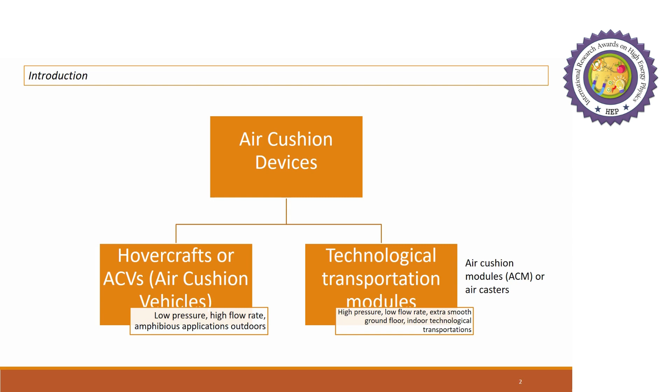However, thus far, a theory that convincingly describes the stability of a high-pressure ACM in equilibrium state and its vertical up and down dynamics has not been reported in open literature.

The vertical dynamics is important because high-pressure ACMs undergo vertical auto-oscillations. This compels operators to reduce the airflow rate in the module to a minimum, thus increasing the friction force. This fact constrains the application of high-pressure ACMs.

It also prevents lowering the stringent requirements of the support surface. For example, to reduce friction for moving loads on a typical concrete surface, the airflow rate must be 25 times greater than the rate required for a smooth steel sheet surface.

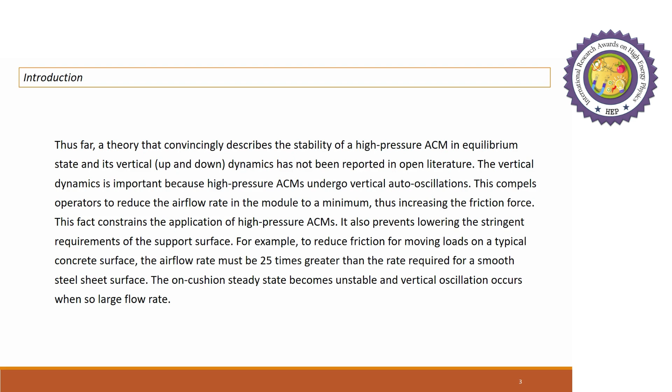Then the on-cushion steady state becomes unstable and vertical oscillation occurs when so large a flow rate is used.

Accordingly, in this study, an analytical model of the ACM vertical dynamics is devised. Moreover, the stability of its on-cushion steady state and its dynamic behavior when auto-oscillating are investigated.

Air compressibility is consistently considered not only for the cushion plenum zone, but also for the inlet and outlet flow regions. Traditional linear stability analysis is supplemented with a numerical evaluation of the nonlinear system response. This provides deep insight into a broad view of the physics of the vertical vibration of high-pressure ACMs.

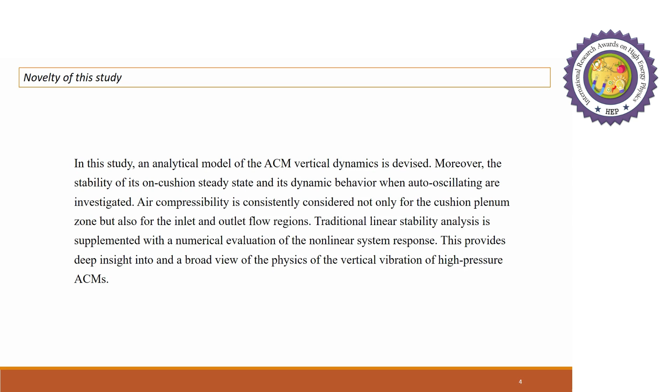A typical high-pressure ACM is illustrated in Figure 1. The influence of the flexible bellow or skirt for ACVs on the air cushion system dynamics is expected to be significant.

However, the coupled processes of cushion aerodynamics, hull motion, and flexible bellow dynamics, including deformation, are difficult to describe. Accordingly, in many studies, the shape of the ACV skirt was considered to be fixed and had no influence on heave dynamics. In establishing the research objectives, assuming a simplified schematic based on the replacement of the rubber bellow by a hard sidewall as shown in Figure 2 is methodologically useful.

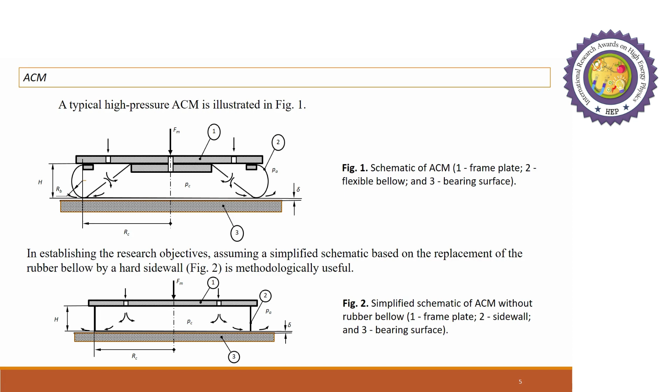The connection of the ACM to a compressed air source is considered according to the circuit shown in Figure 3. The receiver, component 1, is charged from a compressed air network or individual compressor. The pressure-reducing valve, component 2, maintains constant pressure P sub R before the inlet of the air cushion module.

The air temperature T sub R before the inlet is assumed to be constant. The throttle valve, component 3, at the inlet enables flow rate variation into the air cushion with constant supply pressure P sub R. The volume of the air cushion is component 4.

The outlet gap between the rubber bellow in Figure 1 or sidewall in Figure 2 and floor is considered as a throttle orifice 5, varying with the cushion pressure P sub C.

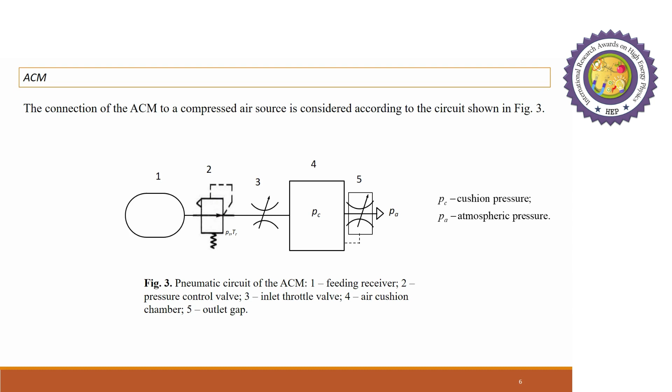Involving the dynamics of the rubber bellow in the analytical study of ACM equilibrium stability is problematic. Therefore, at this stage, an ACM based on the schematic in Figure 2 is considered to determine the internal regularities that do not depend on the rubber bellow.

Most studies on the vertical dynamics of the ACV and high load ACM are based on a mass balance equation for the air volume in the cushion and a vertical motion equation for the framework and external loading.

In a general form, the mass balance equation is as follows, equation 1. The equation of vertical motion can be expressed as equation 2. Volume V sub C can be represented as equation 3. Using additional expressions for the inlet and outlet volume flow rates, equation 1 transforms into equation 4.

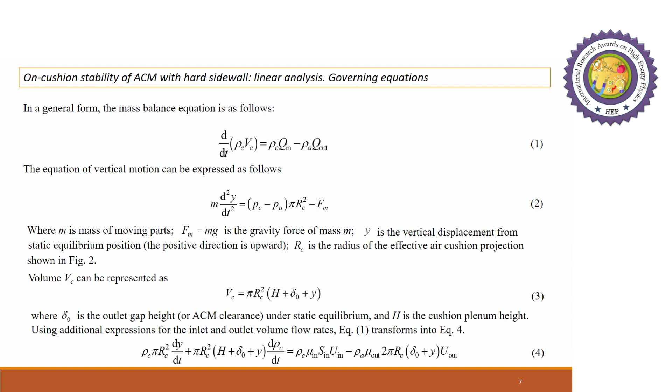The force balance equation at equilibrium is given by equation 5, representing the actual cushion pressure as the sum of its equilibrium value and a dynamic variation. Using equations 2 and 5 yields equation 7. The supply air density ρ sub R can be defined from the ideal gas state equation.

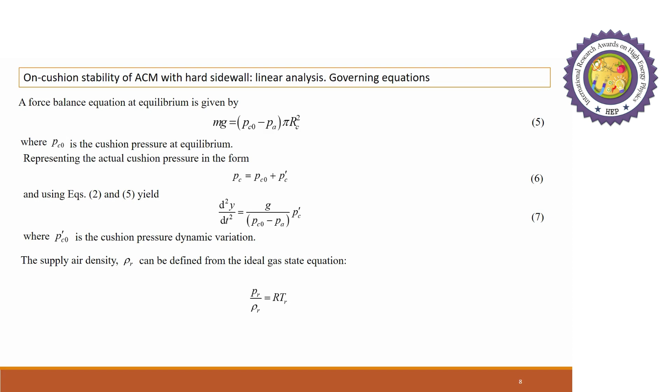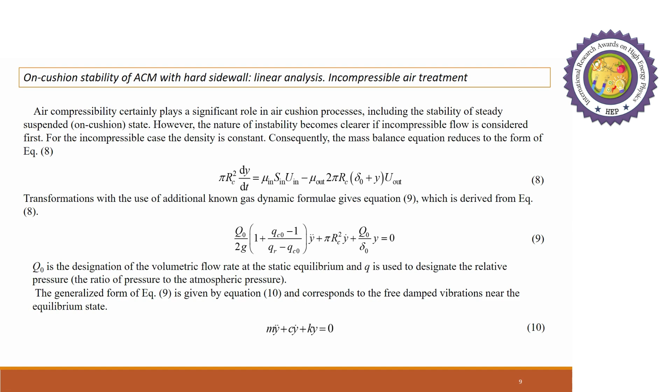The generalized form of equation 9 is given by equation 10 and corresponds to the free damped vibration near the equilibrium state. Equations 9 and 10 follow the natural frequency of vibration and damping ratio.

In linear analysis, vertical displacements are small, hence the cushion volume change in vibrations may be ignored. The damping term in equation 9 vanishes in this case without any other changes. Thus, the ACM with a hard sidewall is linearly stable, independent of the equilibrium cushion pressure and flow rate, when operating on incompressible fluid. Moreover, the damping of free vibrations is associated with a small cushion volume change due to the vertical displacement.

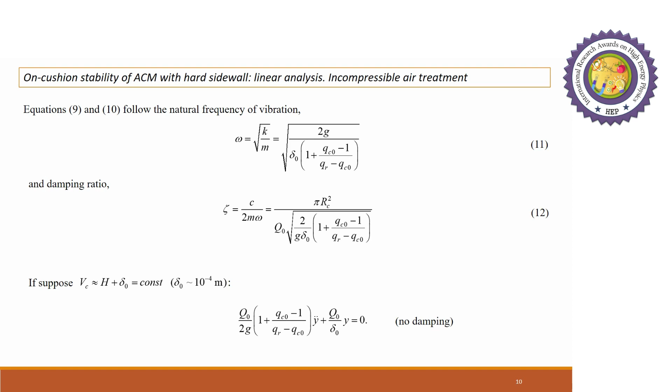A typical contact spot diameter for ACMs is approximately 1 meter, and the relative cushion pressure can be assessed to be less than 4. Note that when relative cushion pressure is 1.5, the loading capacity is approximately 40 tons per module.

Air compressibility is a significant factor when the foregoing pressure. Moreover, the incompressible flow model doesn't display the instability phenomenon as shown above. For the cushion pressure range and dimensions specified, the assumptions can be formulated, which are presented in Table 1.

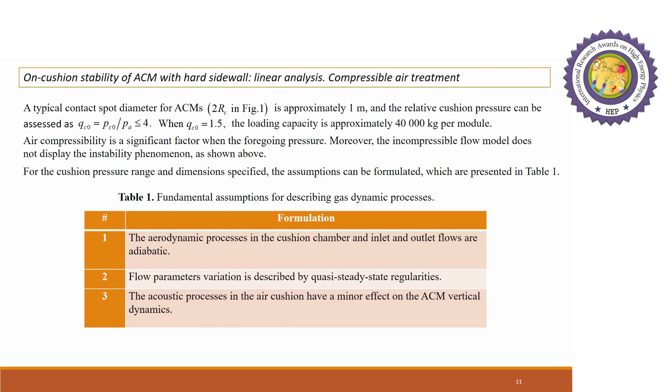They are: first, the aerodynamic processes in the cushion chamber and inlet and outlet flows are adiabatic. Flow parameters variation is described by quasi-steady-state regularities. The acoustic processes in the air cushion have a minor effect on the ACM vertical dynamics.

Consider the subcritical flow mode at the inlet and outlet. The parameter domain is defined by inequalities 13. For subsonic adiabatic flows, the inlet and outlet air velocities can be defined by the formulae 14 and 15. The pressure-density relationship for adiabatic gas dynamic processes is given by equation 16.

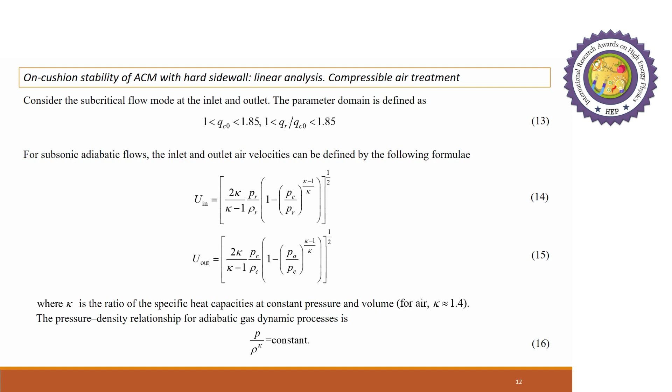Based on equations 14 to 16 and some other gas dynamic relationships, after a series of transformations, mass balance equation 4 can be reduced to the following form, equation 17. Thus, the perturbed vertical motion of the ACM near the static equilibrium position is described by a third-order ordinary differential equation. Equation 17 can be expressed in the form of equation 18.

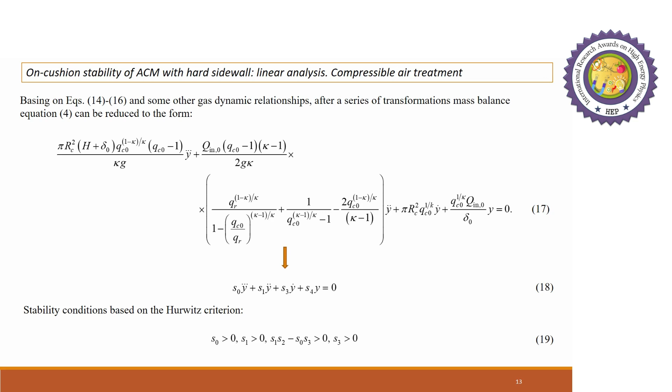The stability of the equilibrium state can be evaluated by the Routh-Hurwitz method applied to equation 17. In particular, the following stability condition is derived from the Hurwitz criterion, expressed by inequalities 19. When condition 13 for subcritical flow is satisfied, the first and last conditions of inequalities 19 are also clearly invariably satisfied.

The second condition can be reduced to the following, inequality 20. The variation in the f sub 1 function, considering different values of the relative supply air pressure and relative cushion pressure for subcritical flow, is presented in figure 4. As shown in the figure, the second condition in inequalities 19 is consistently satisfied.

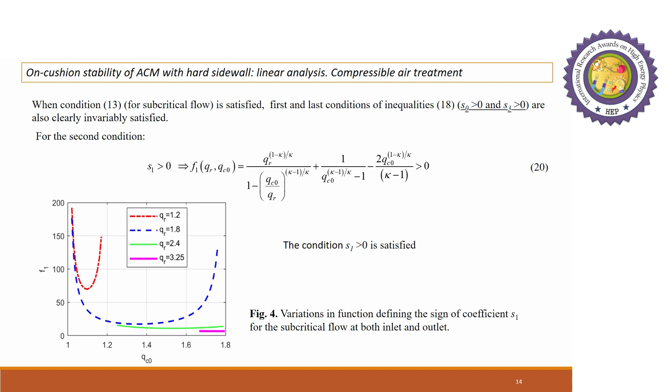Thus, the final decision on stability can be made by checking the third condition in inequalities 19, based on the second diagonal minor of the Hurwitz matrix of equation 19. Substituting the expressions for coefficients s sub i from equation 17, the following form of the stability condition is obtained after transformation: expression 21. The stability domain corresponds to positive values of f sub 2, whereas negative values indicate instability.

The graphs of f sub 2 variations for several values of parameter H over delta sub 0, the relative cushion height, are shown in figure 5. The parameter domain corresponds to the subcritical flow at the inlet and outlet.

Based on the results presented, a stable static equilibrium is only possible when either cushion pressure approaches atmospheric pressure, or cushion pressure approaches supply pressure. Moreover, the lower the value of relative cushion height, the more stable the ACM floating state, because the typical outlet gap for higher load ACMs is approximately 0.1 mm and low cushion pressure is not used.

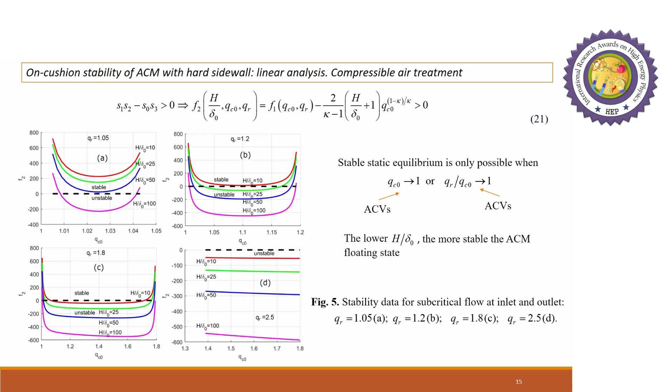In a study of the vertical dynamics of an ACV near an equilibrium position, the outlet flow rate variation due to changes in the outlet surface area is usually neglected. Only the change in flow rate due to the pressure variation in the cushion is considered. The low ACM vibrations can be similarly analyzed.

Using these assumptions gives equation 22 instead of equation 18. After integration, equation 23 is derived, which denotes the free damped vibration near the equilibrium state. It is analogical to the case of incompressible air treatment.

This contradicts the results indicating the instability of the ACM in most possible parameter combinations. Nevertheless, the frequency and damping ratio for the oscillation can be defined by equation 23 and then compared with the result of the case involving incompressibility. For the frequency, equation 24 is derived, and the damping ratio is defined by equation 25.

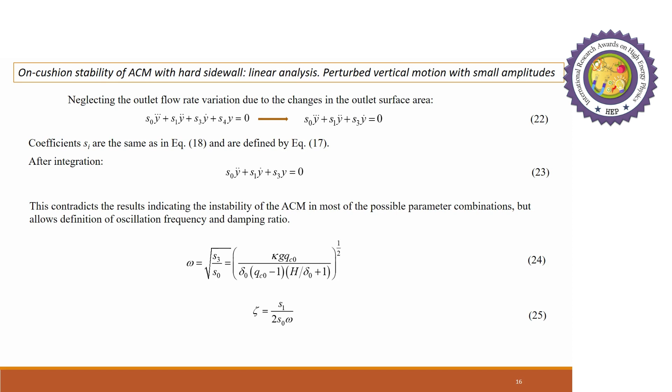The graphs of the vertical oscillation frequency for the compressible and incompressible flow treatments, defined by equations 24 and 11 respectively, are shown in Figure 6. In the compressible case, frequency depends on relative cushion height, and in both cases, frequency depends on the gap height, delta sub 0.

Comparing the data in Figures 5 and 6, the compressible and incompressible calculation methods yield the same oscillation frequency when the parameter combination corresponds to the stability boundary, zero value of f sub 2, in Figure 5. This follows from the intersection of lines 2 and 3, as well as lines 5 and 6, in Figure 6. Moreover, the more stable the equilibrium state, the larger the difference between the compressible and incompressible frequency estimation.

In the unstable domain, the definition of oscillation frequency is not valid without further analysis. Thus, neglecting the compressibility of the cushion plenum leads to errors in the estimation of the vertical oscillation frequency by up to 40%.

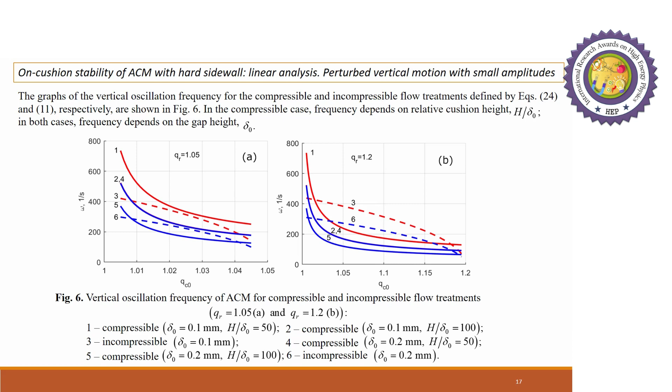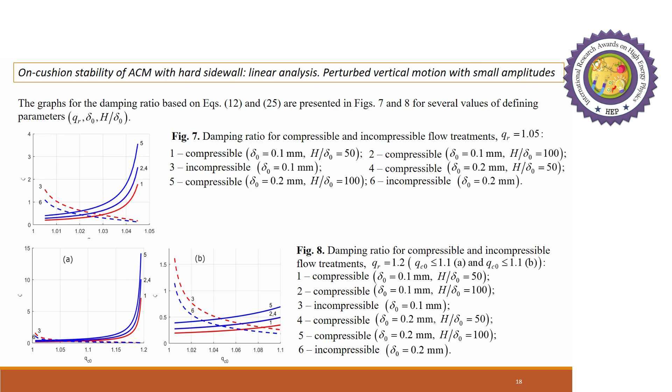The graphs for damping ratio based on equations 12 and 25 are presented in Figures 7 and 8 for several values of defining parameters. From these graphs, different trends follow in the perturbed vertical motion of the ACM, underdamping and overdamping, when cushion pressure approaches atmospheric pressure and supply pressure within low pressure and high pressure stability zones.

Based on more consistent compressible flow consideration, the ACM equilibrium is unstable except when the cushion pressure is extremely low or approaches the supply air pressure.

Thus, the analysis shows that for an ACM without a rubber bellow, oscillatory damped perturbed vertical motions when cushion pressure is less than 1.05, and aperiodic damping motions when cushion pressure approaches the supply pressure, are possible.

The foregoing consideration indicates that for an ACM with a hard sidewall, stable equilibrium is possible in a narrow area of the parameter domain. In contrast, in most areas of the domain, oscillatory instability exists with increasing initial small perturbations, including vertical displacement and cushion pressure variation.

Therefore, a study of the finite amplitude vertical motion of the ACM, without assuming small values in the dynamic variations of all equilibrium parameters, is significant. This results in a nonlinear problem formulation, which is considered further.

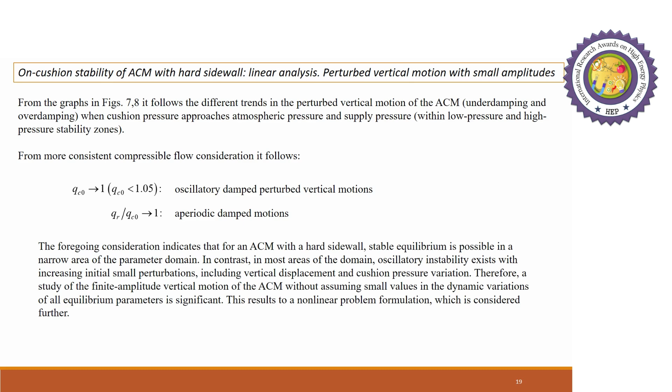The stability results of this study are in full agreement with earlier observations reported in open literature with respect to ACVs for applications in which cushion pressure is low. Therefore, the stability results of the current study are compared with the experimental values of Sweet et al., in terms of the typical operational parameters of ACV.

The air cushion configuration, including the constant supply pressure provided by a large external reservoir, considered by Sweet et al., is similar to that examined in the present study. The comparison results in terms of the f sub 2 function are presented in Figure 9. Based on the data in Figure 9, the theoretical estimation of the stability boundary is adequate for the actual process.

The present analysis is anticipated to be adequate for the higher pressure ACM because it comprehensively accounts for air compressibility in modeling the cushion area processes, as well as the airflow into the cushion and through the outlet gap.

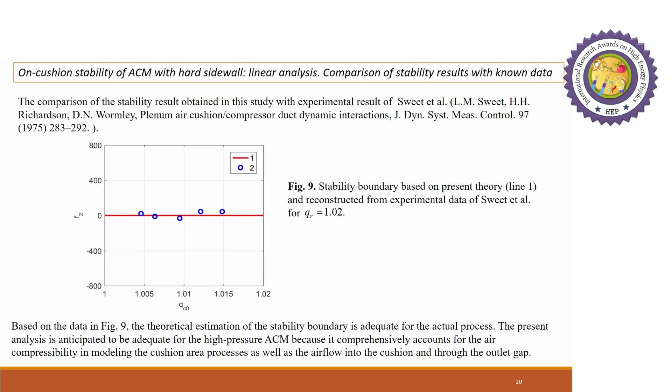In a nonlinear study, a simplified ACM schematic with a hard sidewall is considered. One of the main specific features examined in the finite amplitude ACM motion is the possibility of the outlet gap closing when the sidewall touches the ground.

A convenient and feasible case of a sliding sidewall is considered, as illustrated in Figure 10. The design allows the frame to continue moving after the bottom of the sidewall touches the ground. In the first approximation, the friction force between the sliding wall and guide is neglected, resulting in zero reaction force. The mass conservation equation can be rewritten as follows, equation 26.

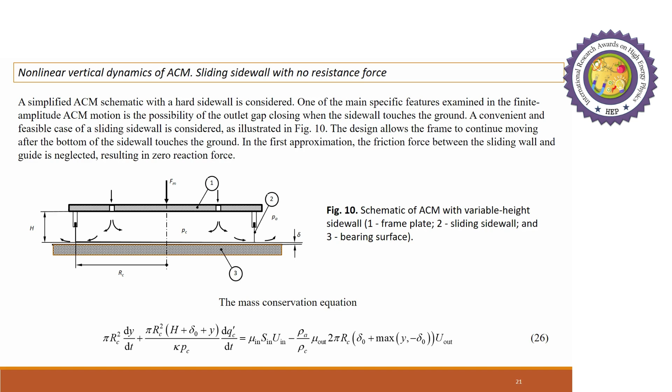Motion equation 7 can be rewritten as equation 27. The cushion dynamic pressure variation is not considered a small quantity, and relative pressure formulation is still applied. Motion velocity can be denoted according to equation 28. After transformations allowing for the model specifics, the mass conservation equation 26 takes the form of equation 29.

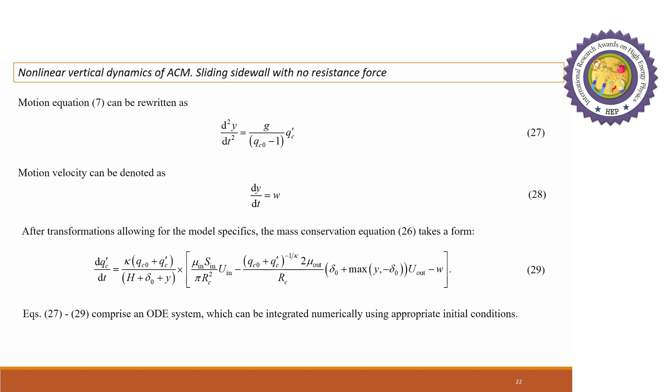Equations 27 to 29 comprise an ODE system, which can be integrated numerically using appropriate initial conditions. Some results in the form of responses of the cushion dynamic pressure and ACM vertical displacement are presented in figures.

In particular, small initial perturbations are observed to diminish when cushion pressure approaches the atmospheric pressure or approaches the supply pressure. For example, both linear stability analysis and finite amplitude motion analysis predict the low pressure and higher pressure stability boundaries in good correlation. The finite amplitude behavior of the system near the stability thresholds agrees with the linear analysis prediction.

Based on the linear theory, there are damped perturbed oscillatory motions when cushion pressure approaches the atmospheric pressure, and aperiodic damping when cushion pressure approaches the supply pressure.

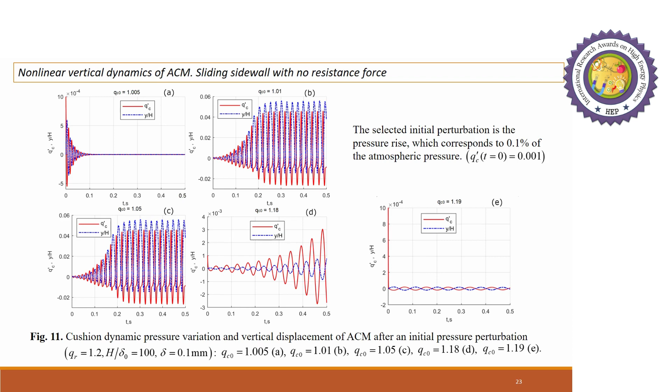The results for higher cushion pressures are given in figure 12, which support the same trends. Near the linear stability boundary, the increase in perturbation amplitude plateaus at some level. However, the farther the distance from the stability boundary, the greater the dynamic pressure and displacement amplitude.

The upward ACM vertical displacement becomes equal to the height of the cushion plenum H. Seemingly, the module jumps with the load. Note that the amplitudes seem to increase with time. However, extremely large amplitudes of pressure variation and vertical oscillation are not possible.

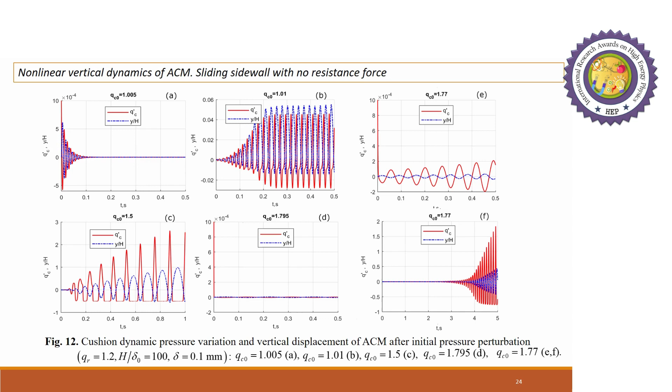Hence, the maximal values of the vertical displacement and cushion pressure oscillation amplitudes are expected to be lower than those predicted by simulation, first of all due to damping. The vertical motion of ACM is periodic.

In this regard, an interesting question is how the frequency of finite amplitude oscillations correlates to the frequency defined by linear analysis. As it was shown, the stable oscillatory motion shifts to oscillation with the increase in amplitude as cushion pressure exceeds the stability threshold near the value of the atmospheric pressure.

This is fully confirmed by the nonlinear analysis. The frequency amplitude characteristics of relative vertical displacements, obtained using the discrete Fourier transformation of y of t, the vertical displacement correlation, are shown in Fig. 13. The parameter combination is selected which is suitable to reflect typical system behavior beyond the linear stability threshold.

Different time frames are considered to determine the possible evolution of dominant frequency with time. In each of the three characteristics shown in Figure 13, the first peak is observed at zero frequency. This corresponds to a constant shift of the span center from the equilibrium position, y equals 0. The shift increases with time, as reflected by the increasing amplitude in the first peak with time frame length.

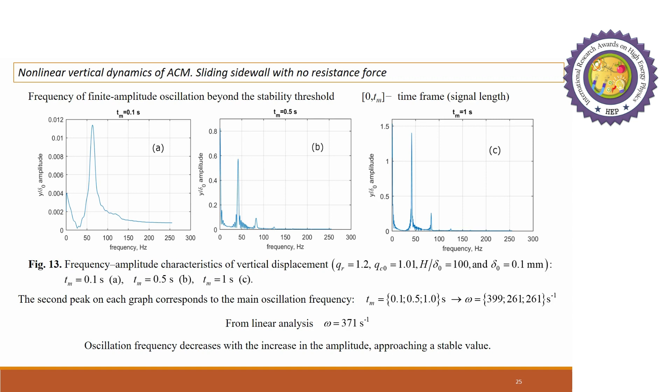In the model considered above, no energy dissipation mechanisms are involved. Hence, the displacement amplitude can considerably increase to higher ACM jumps, which are barely feasible. Thus, analyzing the influence of damping mechanisms has practical significance.

For instance, a resistant force, proportional to the vertical velocity and acting when the sliding sidewall is in contact with the ground, can be facilely introduced into the model. This idealization is consistent with the effect of the rubber bellow and the deformation of the sidewall when it touches the bearing surface. The incorporation of the resistance force into the vertical motion equation transforms it into equation 30.

With increasing amplitude, a notable qualitative effect is observed. The greater the damping coefficient, the lower the amplitude, and the faster the amplitude stops increasing.

The model assumptions indicate that the cushion pressure cannot decrease to less than the atmospheric pressure. Nevertheless, it can increase when the outlet gap closes. Therefore, the pressure peaks can increase considerably when damping is relatively low.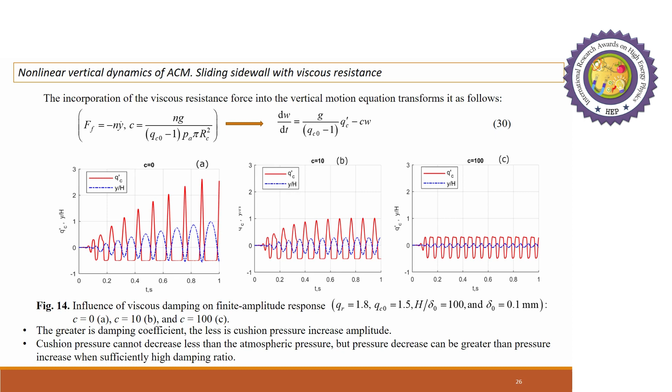The fundamental conclusions are as follows. The ACM facilely becomes an auto-oscillation system when its working pressure increases. Moreover, the vibration and cushion dynamic pressure amplitudes may be extremely high. The main reason for the instability is the air compressibility in the cushion chamber, and the relative cushion height significantly influences the stability boundary.

The most stable operational modes enabling higher lifting are those whose cushion pressure approaches the feed pressure. This is demonstrated to be true for the subcritical airflow throughout the cushion domain. It must be checked when flow at the outlet gap is critical.

Throttling at the inlet destabilizes the ACM with respect to vertical vibration. An acceptable value of module oscillation amplitude can be achieved at any cushion pressure magnitude by introducing sufficient damping.

The results obtained provide insight into the occurrence of instability and specific features of the vertical vibration of ACMs with high loads. The data also extend the design database for the practical development of air cushion cargo transport systems.